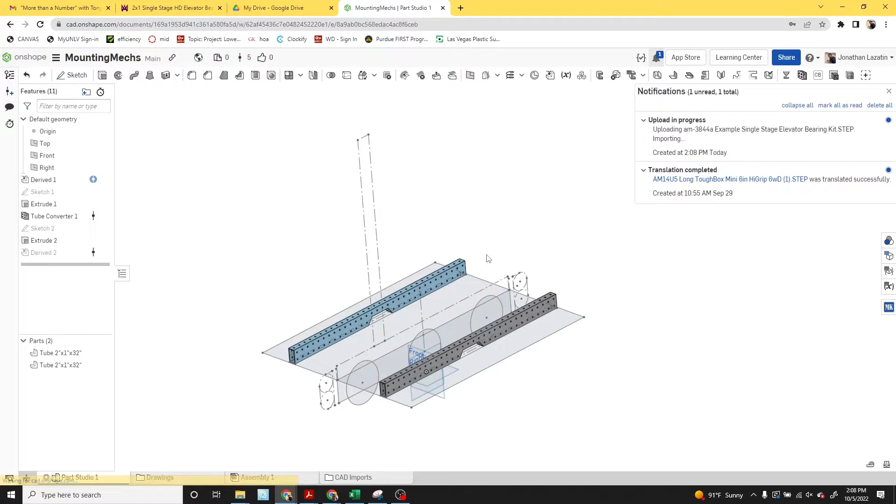Today we're going to go over imported assemblies, looking at the AndyMark elevator, which I'm going to download and drop into my assembly, or to my part studio. It's going to create its own part studio for just that elevator.

Now what I'm going to do is measure the width of my mounting rails and then compare that to the width of the elevator, and then create a cutout of the difference that I need it to contract. So once I do that, I can select this half of the part.

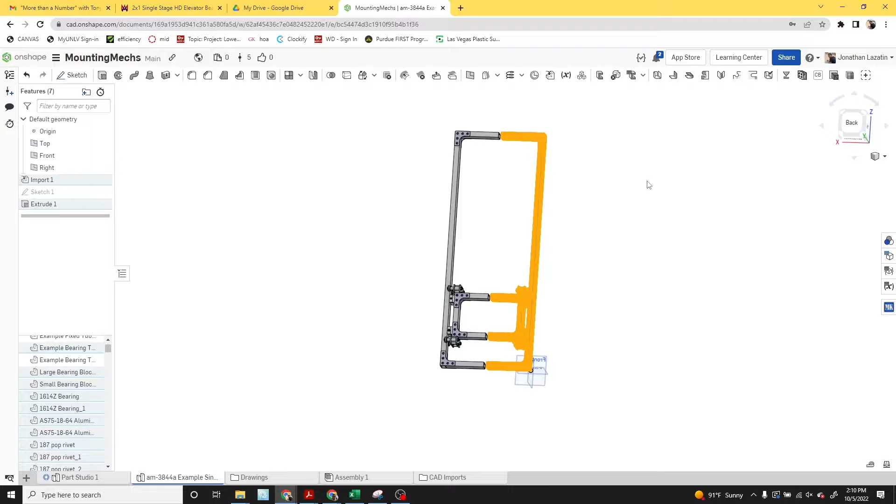I can use the transform tool to move the items I have selected using mate connectors, to move that whole part together. The reason I selected everything is so all the parts move together. I'm just confirming the distance is good, and then I'm going to use the Boolean union tool to make those parts one piece again.

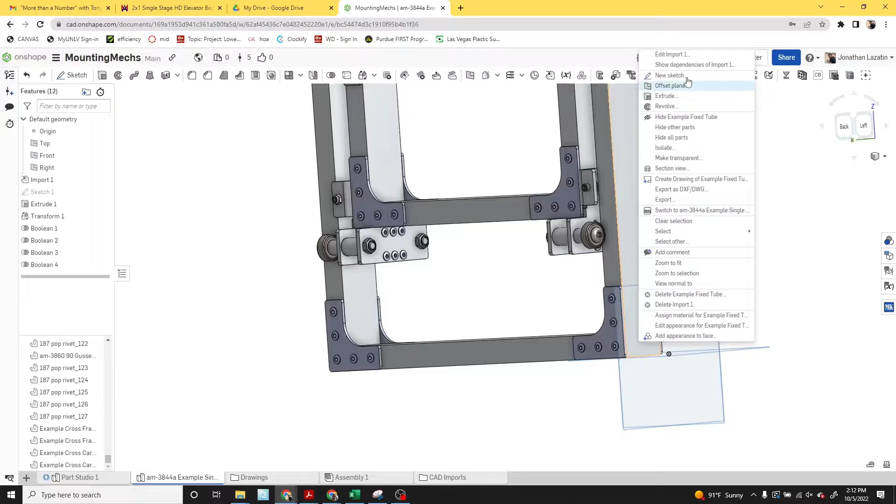Then I'm going to start looking at the side rails and creating a mounting pattern here. I'm using a hole big enough for a 10-32, as well as doing a 1-inch spacing evenly across that side. That's going to allow me to take my side rails.

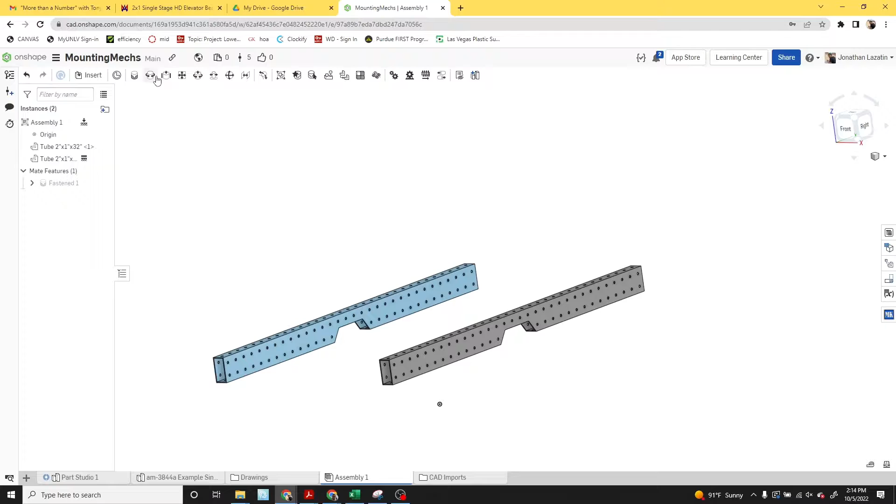I'm going to do a derived sketch to look at where I wanted my elevator to be. I imported that sketch from the main sketch, and I'm going to create a gusset where that elevator is going to mount.

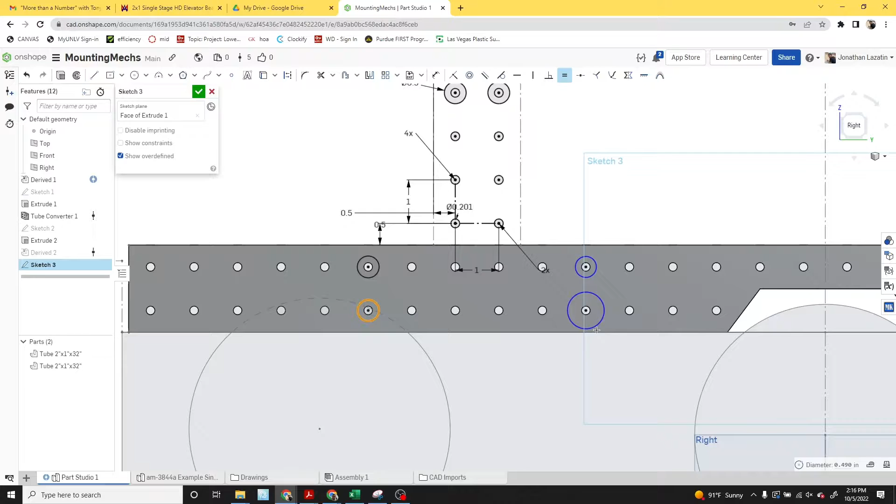I'm going to create the same hole pattern, 1-inch spacing, using a hole size—I believe I used 0.201—and then start creating the edges of my gusset using circles and lines, then creating tangents to those circles to ensure good edge distance from those holes. Then I'm going to trim out the excess lines.

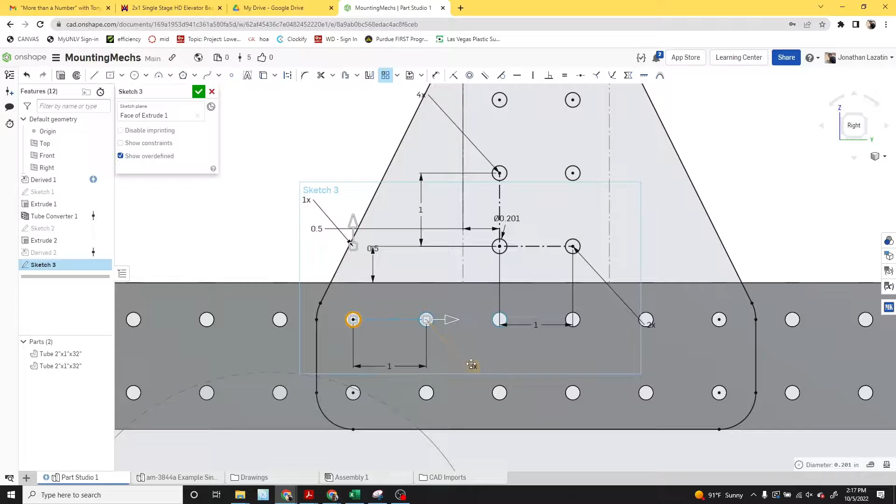I'm going to use the holes of the rail to create a couple holes and then do a pattern to make my gusset. I'm going to extrude that—I believe I did an 1/8 inch there—and then add that to my assembly.

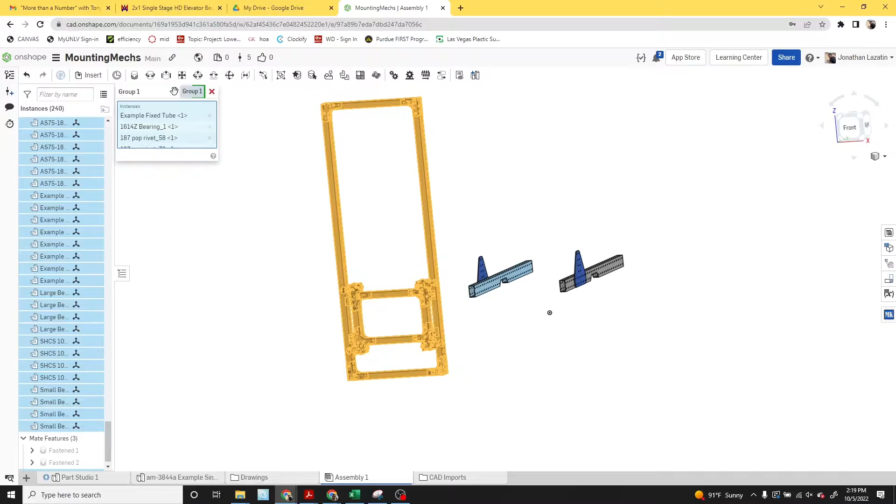Once those are mounted and fastened to my assembly, I'm going to drop in the elevator and use the mounting holes that I created. I have to make sure I group my elevator assembly together so they move together, and I'm going to move it to my mounting location like we see here.

So now I have the elevator on my mounting rails. Next, I'm going to go back to the part studio for my elevator and create some holes that I can use to mount some gussets to hold a motor.

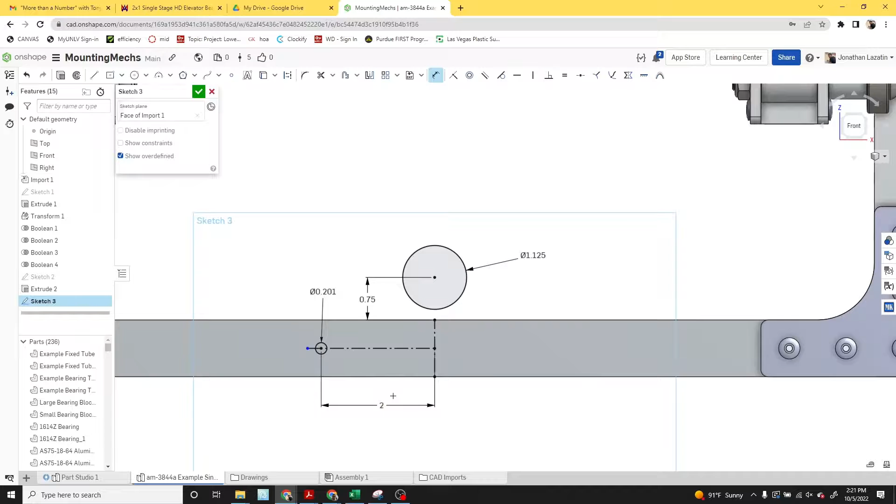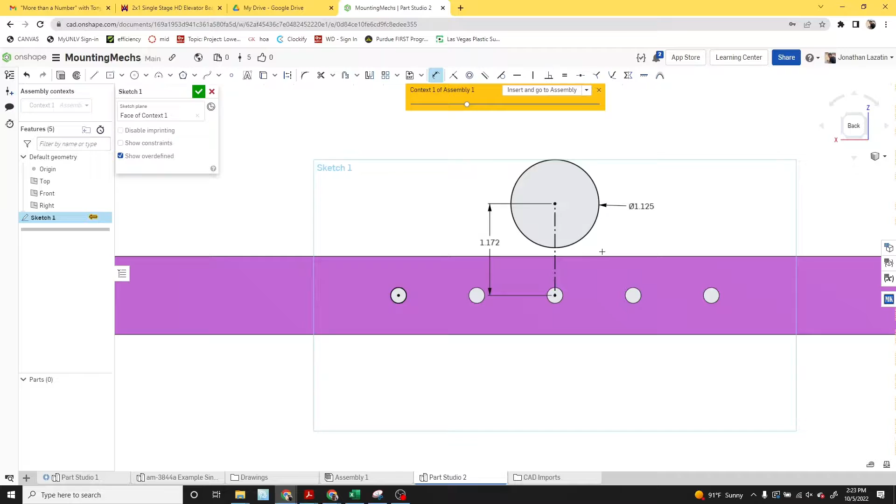Right now I'm starting to draw out where I think I want that motor to be, but I'm actually going to just need the holes for the bottom rail there. Because once those holes are there, I'm going to go back to my assembly and do edit in context, where I'll be able to make some new parts directly referencing the assembly. I have a location where I want a bearing, so that's the 1.125 hole.

I'm using the existing holes that I just created on that bottom rail to create a gusset. I'm going to give myself some material at the ends there, trimming out what I don't need. Now I have a gusset to use for mounting a motor.

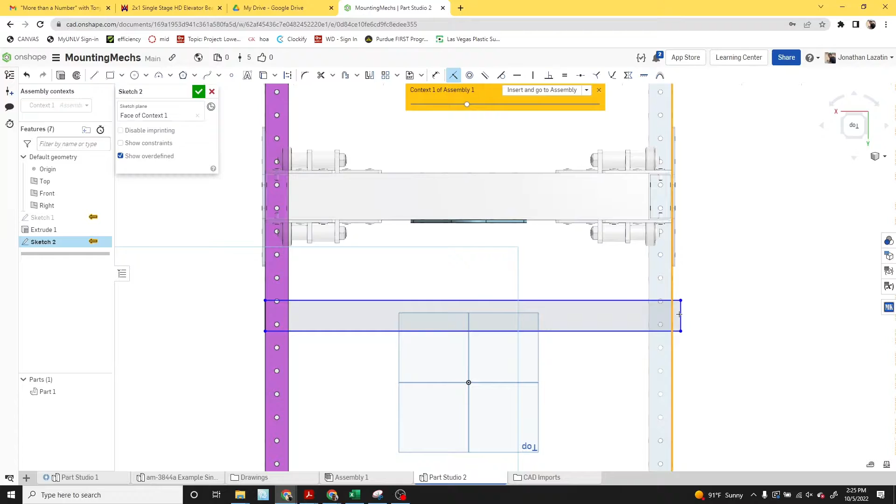I was going to add a rail to mount some more components, but realized I didn't need it. So now I'm going to start looking for the hole pattern that I need for a VersaPlanetary gearbox, because that's what I plan on modeling here.

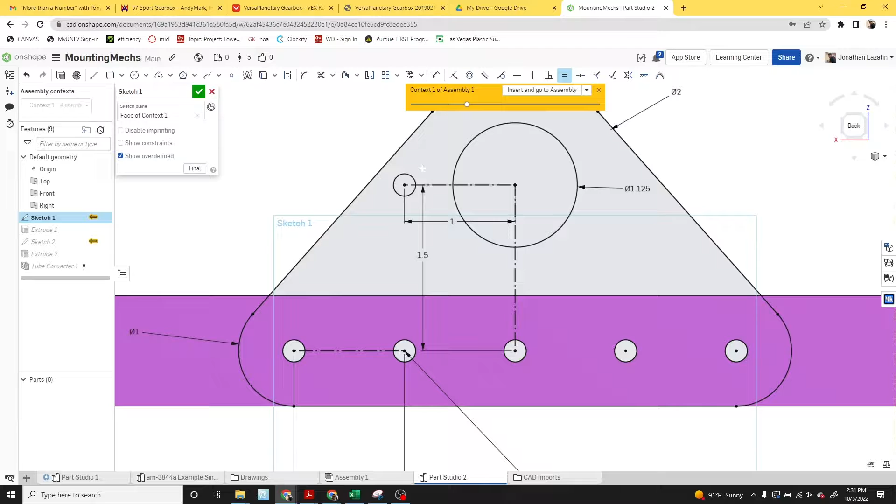So I'm looking for the mounting hole pattern here. I see that it's a 2-inch bolt circle, so I'm going to try to mimic that pattern here, placing a bolt hole about 1 inch away from either side of the hole.

I'm also realizing I'm going to need a very similar gusset on the top, because when I run my chain up, I'm going to need a place for that second sprocket to exist on the top of that elevator. So I'm making those mounting holes.

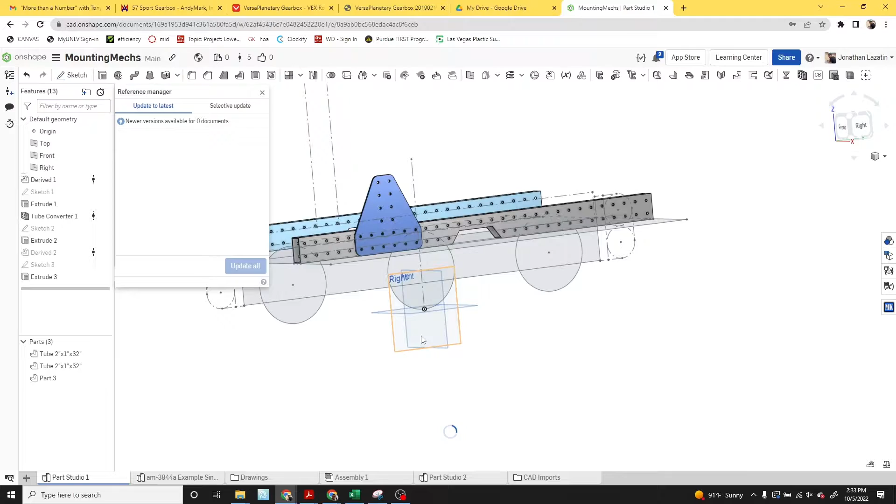There's the mounting rail that I realized I didn't need eventually. So right now I'm just adding all these gussets to start putting together my assembly, using fastening mates on all those hole locations to keep everything fixed onto the main elevator structure.

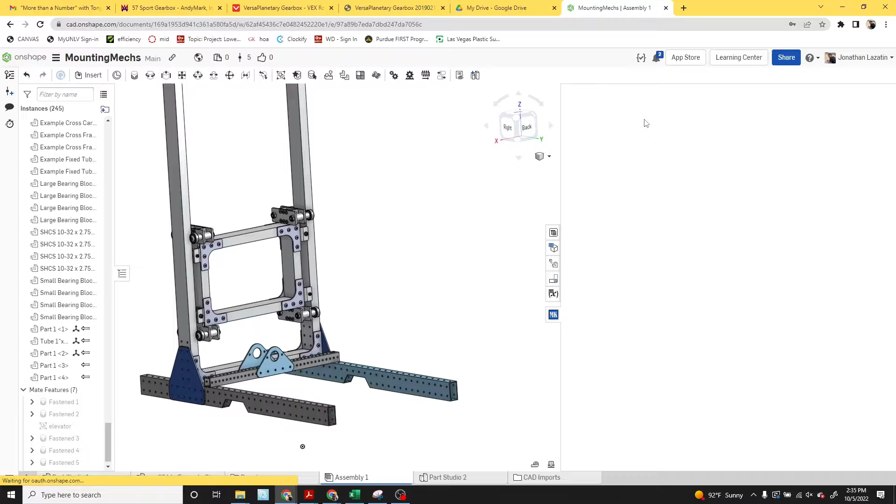Now I'm going to use MKCad to find some bearings that I could put into those gussets. So I'm looking for a 1/2 inch hex bearing, a 24 tooth sprocket, and I'm starting to mount things together to get my assembly going.

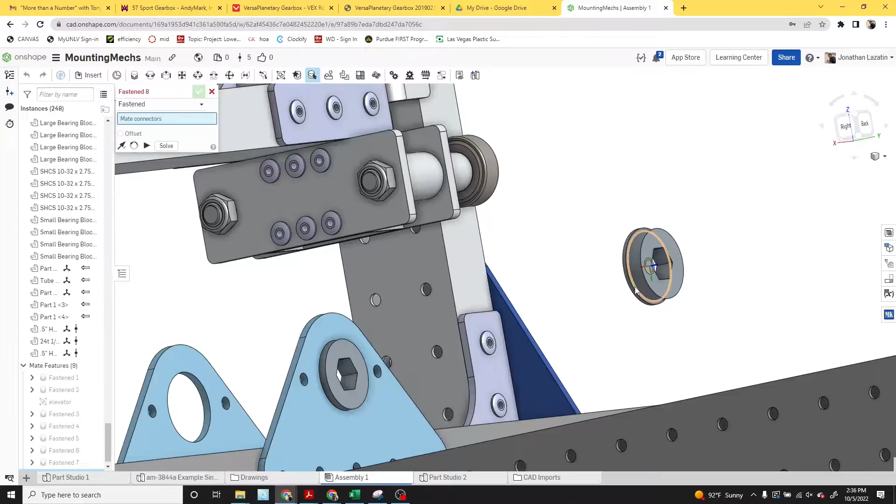Now, fast forwarding through a lot of those bearing installs, I'm starting to align the sprockets to where I need them to be. I'm realizing that bearing needs to turn around in order to match how the sprocket is at the top here.

So I'm going to copy that sprocket and also add it to the bottom location.

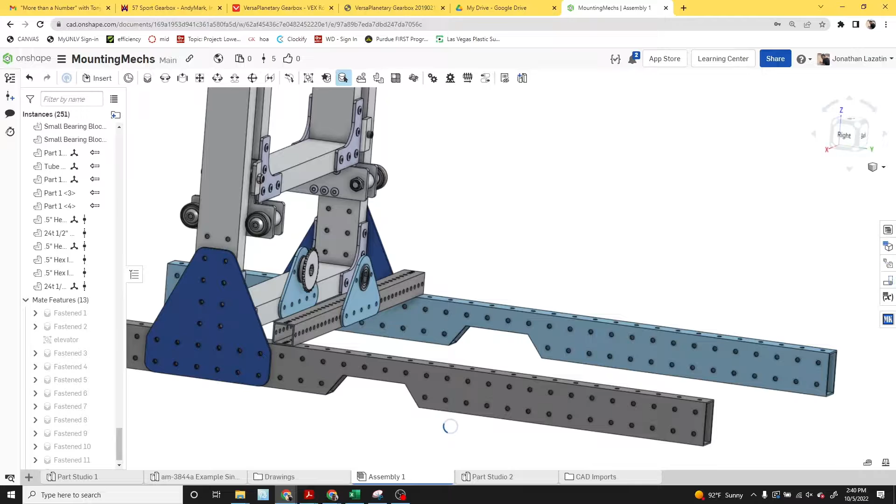Now I'm going to look for a VersaPlanetary gearbox, select some very general parameters. I'm not too worried about that at the moment because I'm mainly worried about getting the assembly together so all the parts fit. Right now I'm seeing that bearing is pushed back quite a bit.

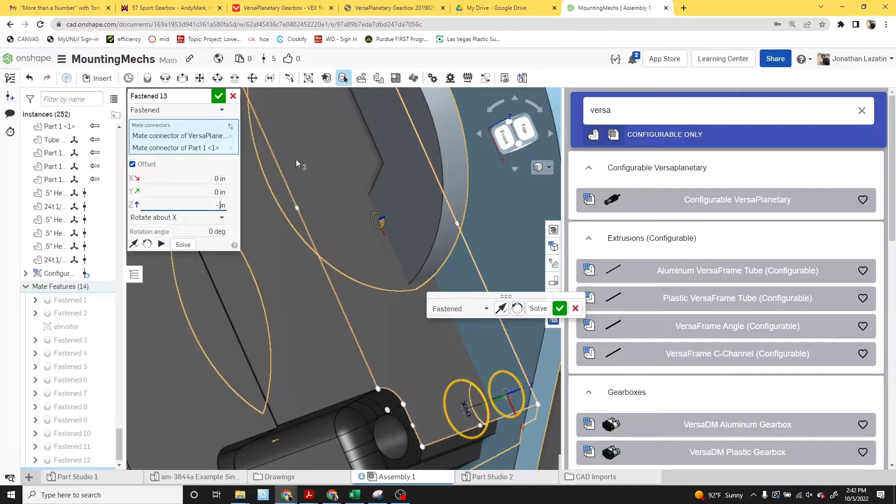So what I'm going to do is add a little bit of space before the motor interfaces with the gusset. Then I can add spacers on the mounting holes to clear room for that bearing.

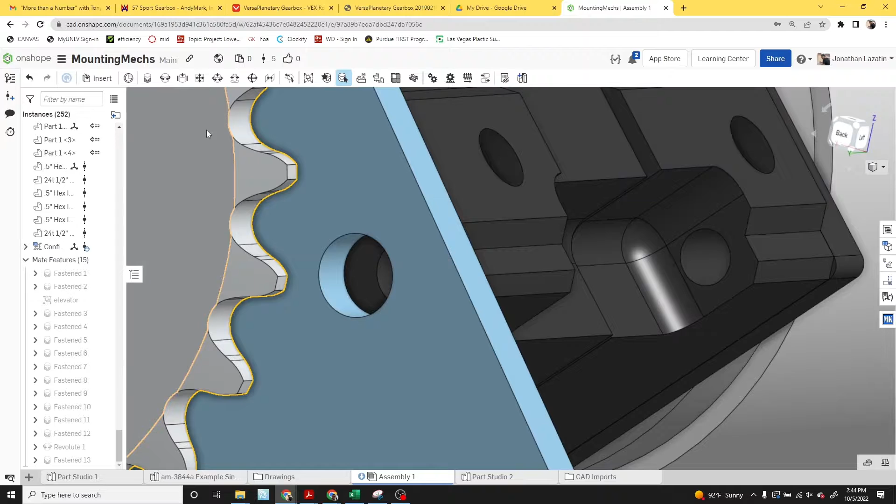So as you can see, I'm backing off that planetary gearbox, and I'm realizing that my gusset is a little bit too short. Once I get all my holes aligned, I'm going to check how that gusset sits there. Yeah, it's too short. So I'm going back to that part for the gusset and giving it a little bit more height, changing that to 2 inches to see how that goes. Oh, look, I got space. So we are good with that mounting.

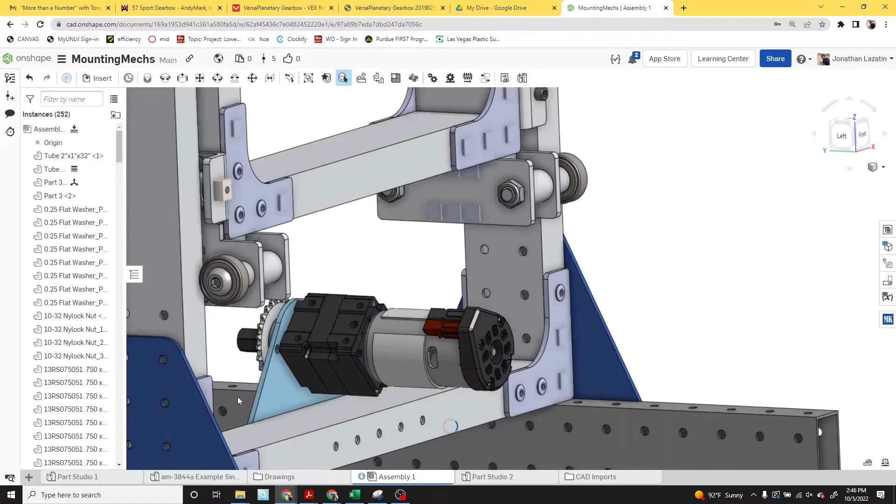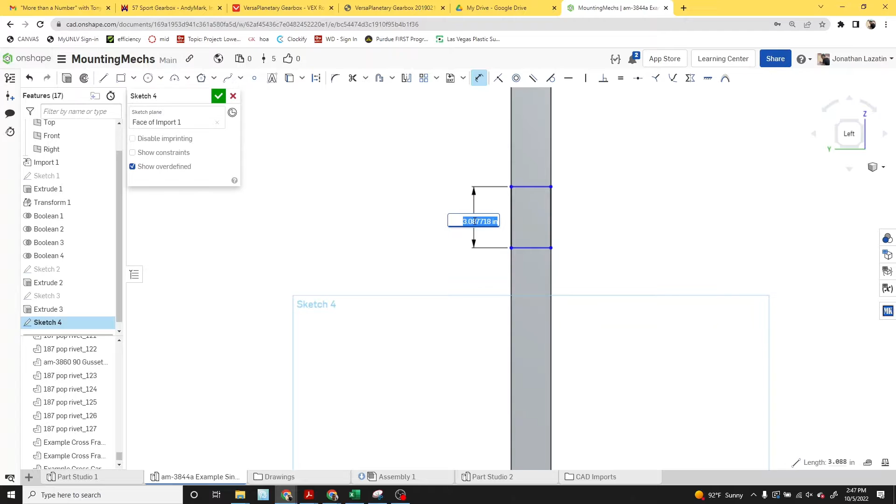Next, I'm going to look for a way to put a chain on there. So I'm specifying the sprocket teeth number for each of those, as well as identifying the distance between the two centers of those holes. I'm realizing that I made my elevator way too tall compared to my main sketch, so I'm going to shorten it the same way we did before, making it more narrow, moving the pieces together using a transform, as well as a Boolean union to connect those parts back together.

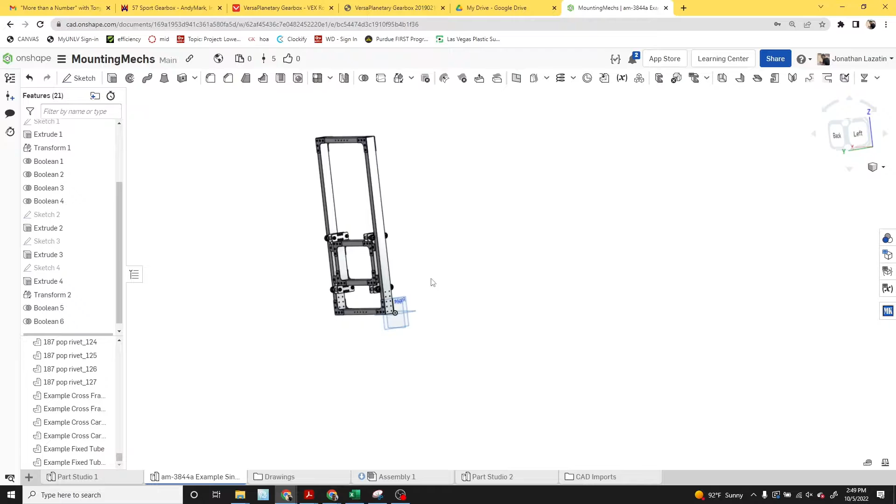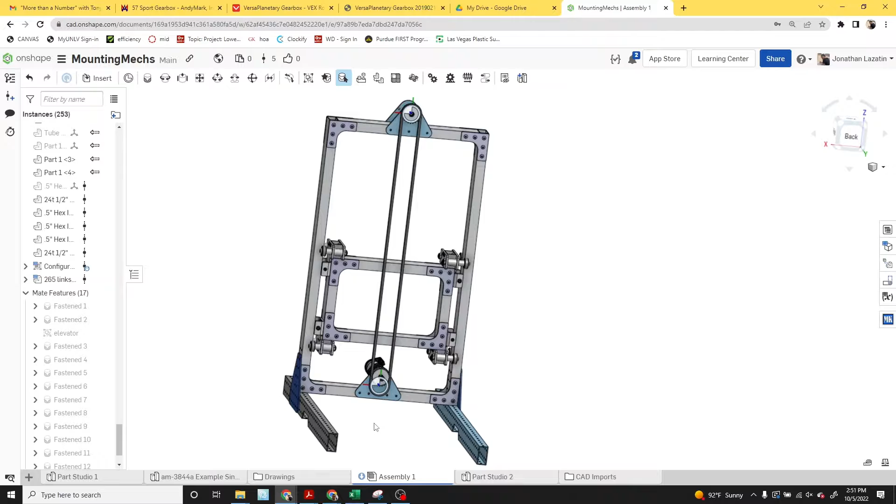So I'm playing around with some heights there, and now I have it back on my assembly. Now it's a lot more of a squat elevator, and now I have my distance, so I can select the radius of my sprocket to create my chain interface, which I'm seeing is not quite the right size, so I'm checking some dimensions and readjusting the distance to get it correct. I'm also noticing it's not centered on that sprocket, so I'm giving it a little bit of an offset so it can be centered at a reasonable location.

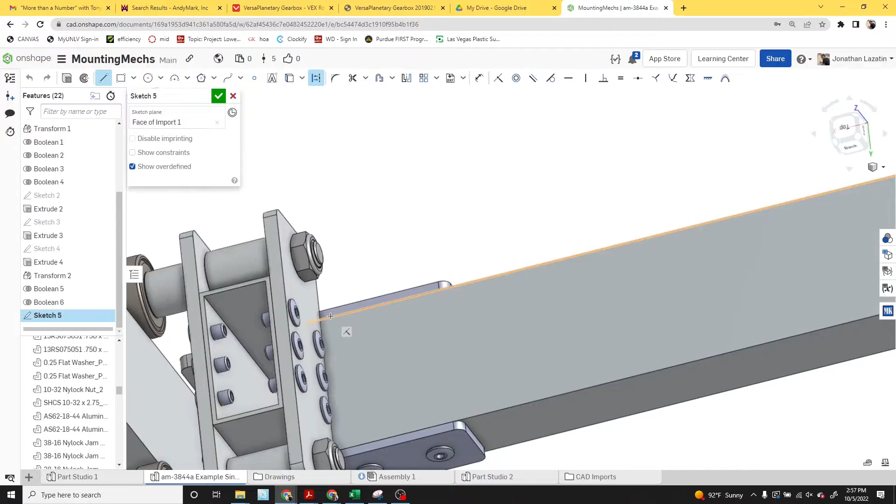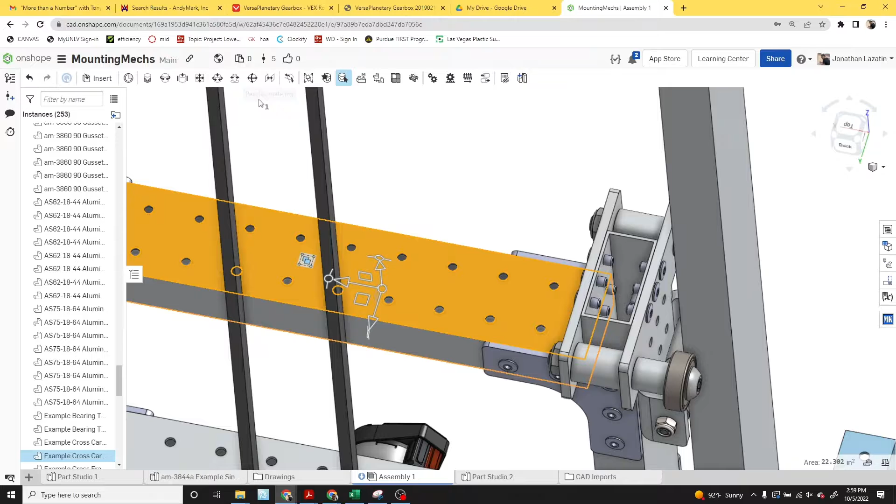Next, I'm going to do a sketch on the top of the elevator carriage, so I can figure out a good location to mount the chain clamp so it can attach to the chain and allow the carriage to ride up and down. So doing my typical hole pattern, 1-inch spacing, 0.201 holes, looking at the chain. Now I'm going to try to figure out how to hold onto the chain.

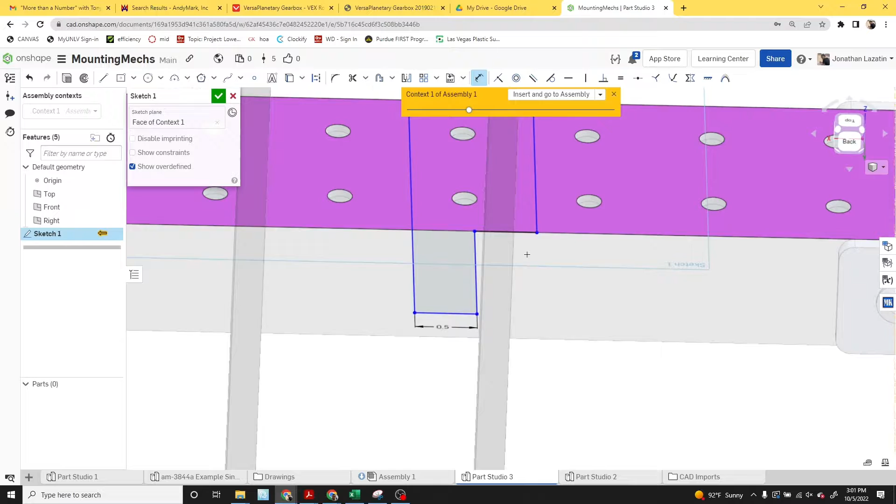So I'm going to go into an editing context, really looking at that top elevator carriage piece. Now I'm going to create a shape that can mount to that carriage as well as clamp the chain. I'm giving it some dimensions, making it 1 inch total width. I'm going to grab those holes so I could fasten it to the carriage, trying to center that 1-inch marking on that hole. It's tangent right now, so I remove that tangent, make it incident to the center, and give it some extrusion. So now I have a surface that tries to grab that hole.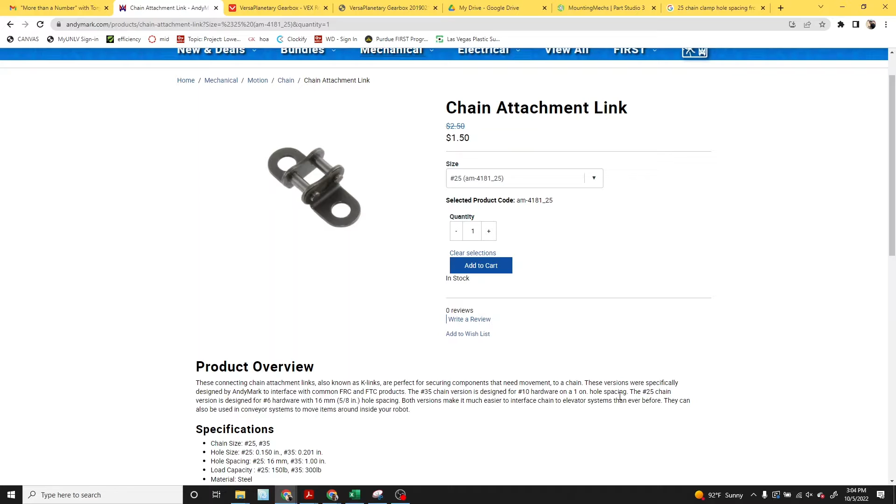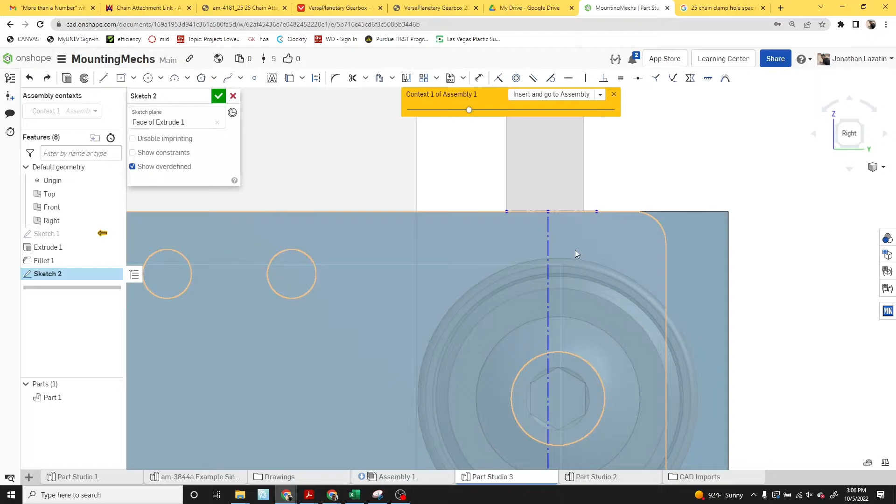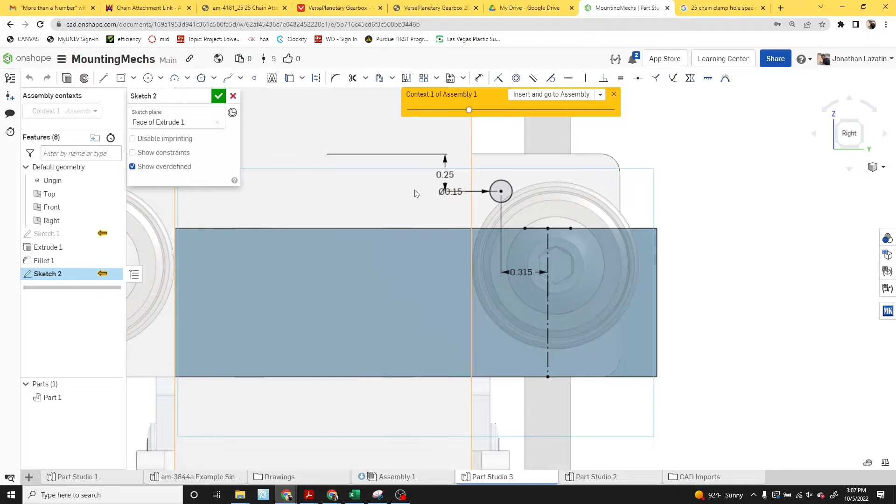So looking at the chain attachment link on AndyMark, downloading the CAD for that to try to see where my holes need to go. Realizing it's a little bit too short, so I'm bringing it out a little. Then I'm creating a center line, trying to get the center of that chain, creating a construction line that I'm going to make incident to both sides of the chain. It's giving me a little trouble, but I finally get it. Then I'm going to center that construction line so I can put 2 holes on the left and right side of that center line that match the hole locations of my chain attachment piece. I'm realizing it's slightly too tall, so I'm going to drop that down and make it 1 inch tall with holes at 1/2 inch high.

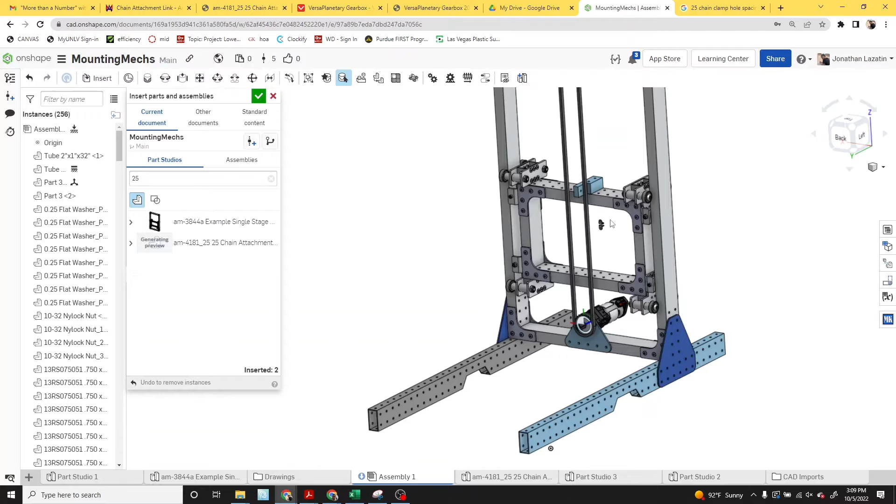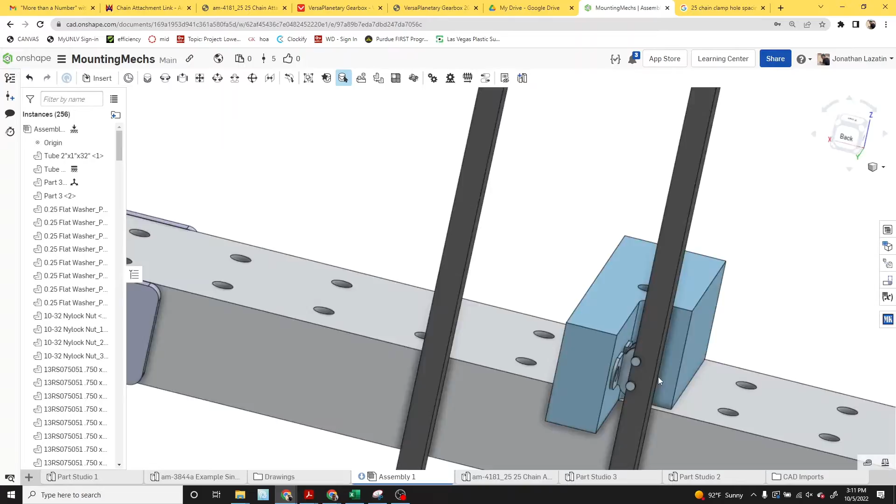So I can do this with a 1 inch by 1 inch stock. I got my piece, downloaded the CAD for the chain attachment, uploaded that to my assembly, and inserted it into this assembly. Now I can use the fastening feature to mate it to my mounting block. I'm realizing the edge is a little too close to the chain block, so I'm going to move this part back to give it some room so I could have a radius there, as well as enough space for the chain attachment piece. So now I got that.

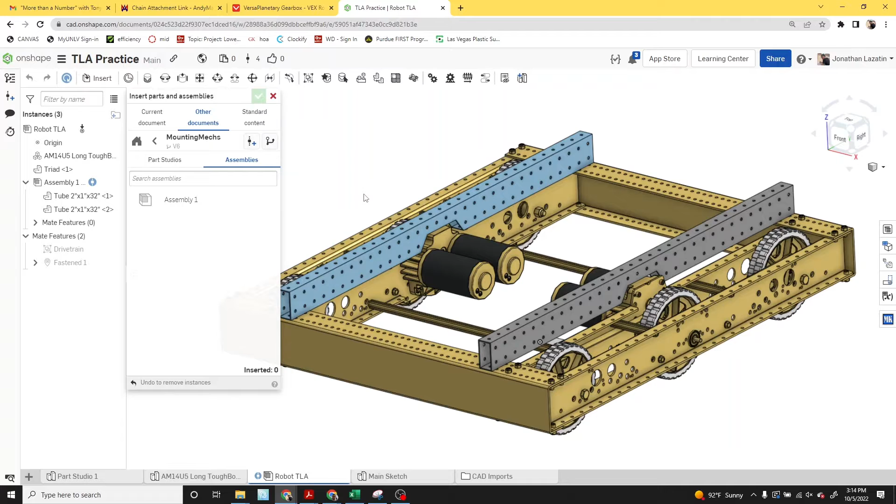Next is just going to be some assembly work on the top level. I'm going to go back to my top level assembly and update my mounting rails that I had already put onto it. Once I get this updated and versioned, I should be able to see what the elevator looks like on top of the chassis. So there it is. Now I'm going to try to start cleaning up this assembly, just looking around, seeing what I want to do next.

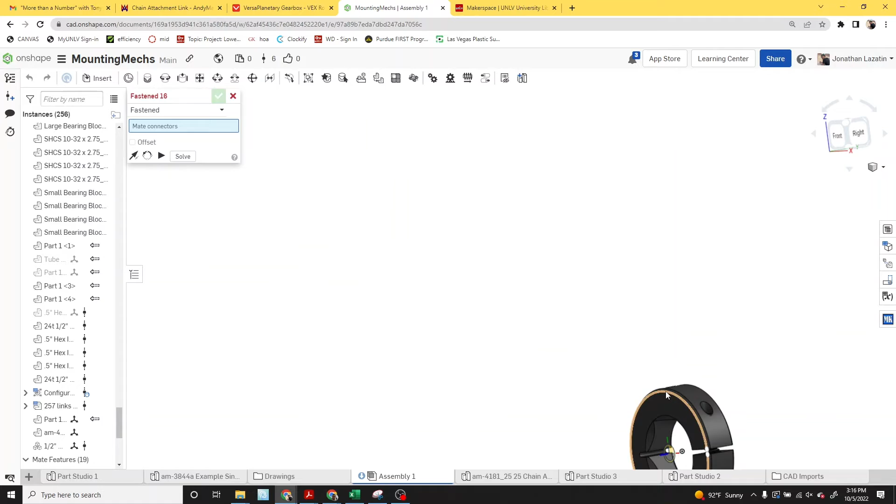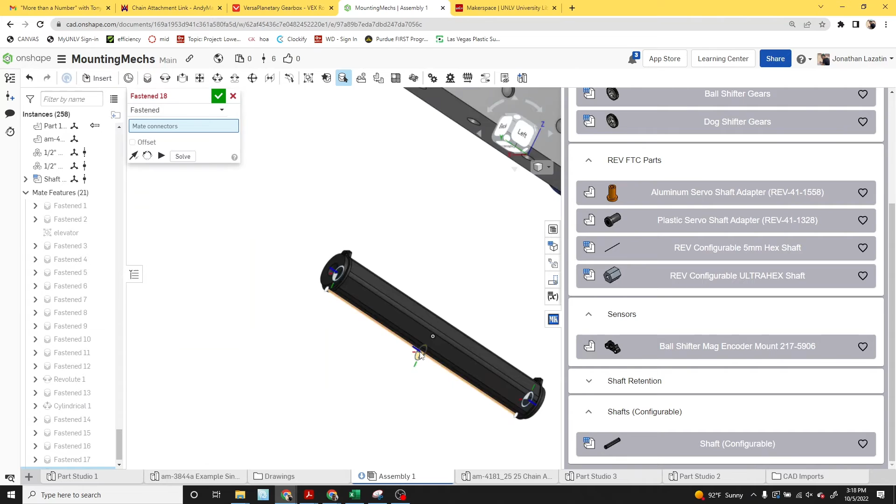Now I'm going to go back to my elevator assembly and start adding in things like shaft collars so they can lock in the bearings. I'm putting the shaft collars first so I could measure the distance between their ends, so I can create a hex shaft at the right distance between those components. So I'm moving that, trying to figure out a way if I can get it without the retention ring, because I don't really need the retention ring.

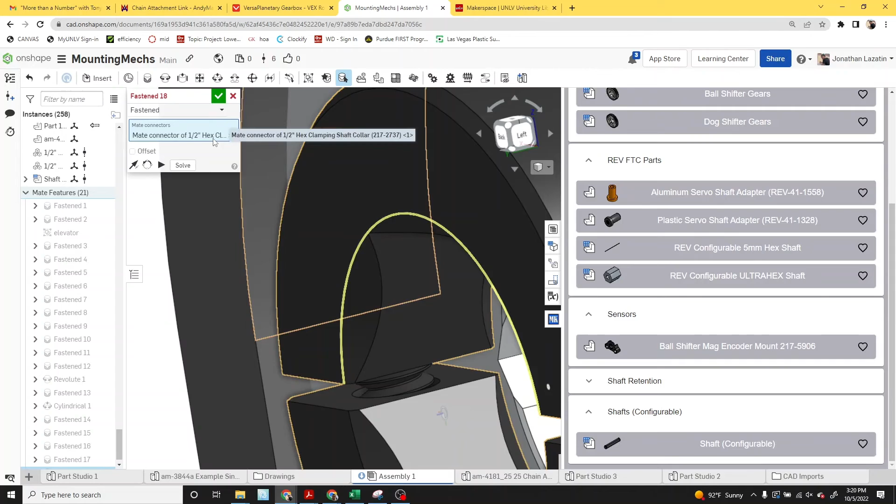So I'm going to do the shaft collar, create my distance. Now I don't have the snap rings, and I added it to the ends of those shaft collars. Then I should put a shaft collar on that bottom, and I think I just forgot. But there is the elevator assembly. Thanks.